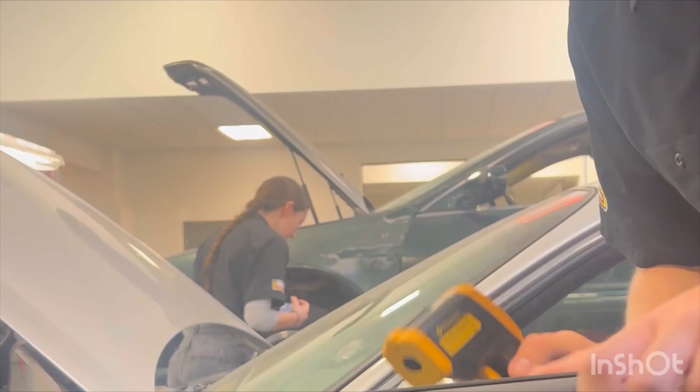Hi, I'm Adam. And I'm David, and today we are doing our catalytic converter temperature lab. And we chose a 2018 Hyundai Tucson for the vehicle that we'll be using for this lab due to the fact that it has OBD2.

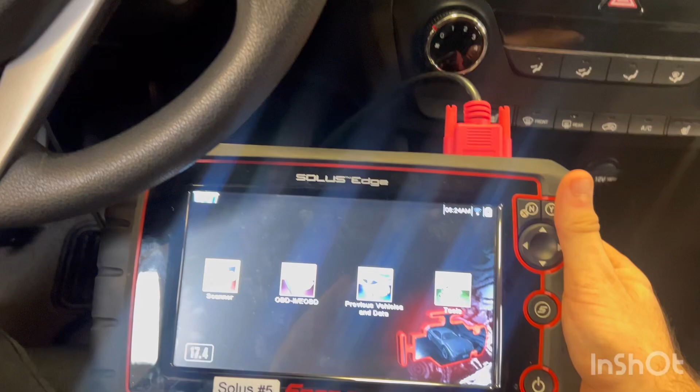Alright, here for the Hyundai, we're going to be getting our post-cat reading before we have the car started. It's going to be sitting at around 72 degrees room temp, and it should be the same for pre-cat as well due to the fact that we do not have the vehicle started.

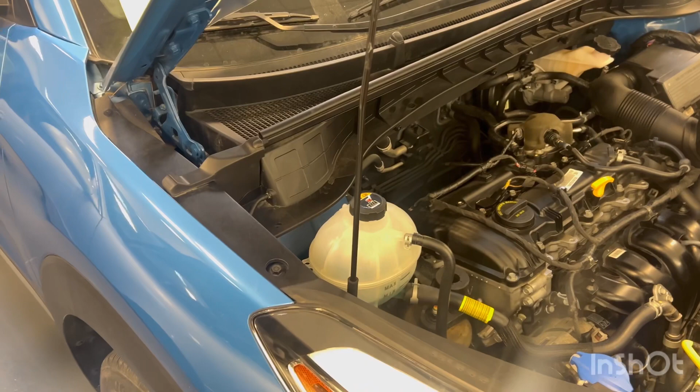So right now I'm going to have Adam start the vehicle, and I'm going to be taking the temperature every minute for the next 10 minutes of our catalytic converter to see it heat up. Now I'm going to start taking the readings once Adam starts the car, and we will be getting pre and post cat for the next 10 minutes.

Alright, here after a minute we can see that we're reading about 130 degrees pre-cat, and post-cat we're getting about near 100 right now. Here we're about the 5-minute mark, and as we can see we're getting readings about 260 degrees beforehand and about 150 degrees post-cat. So you can see that it has a crazy difference in temperature from before that catalytic converter to after.

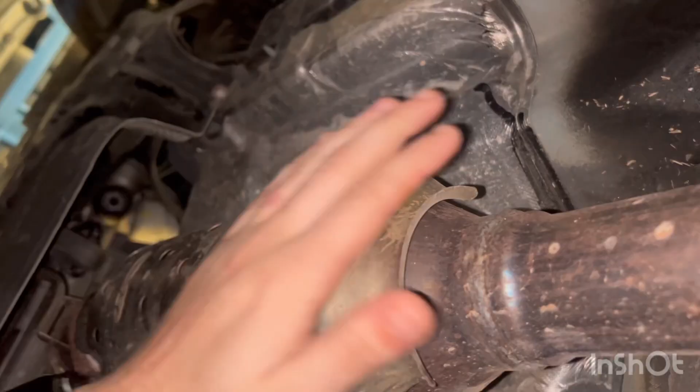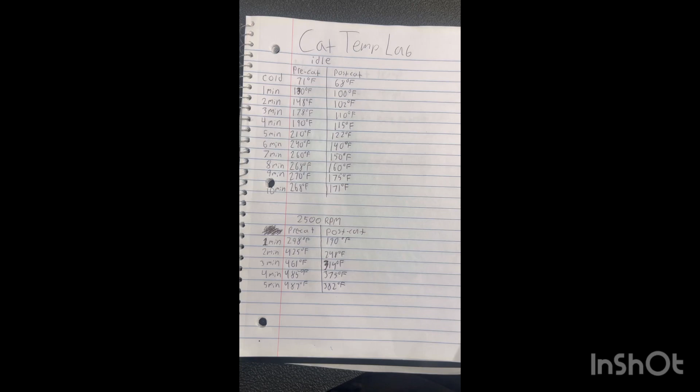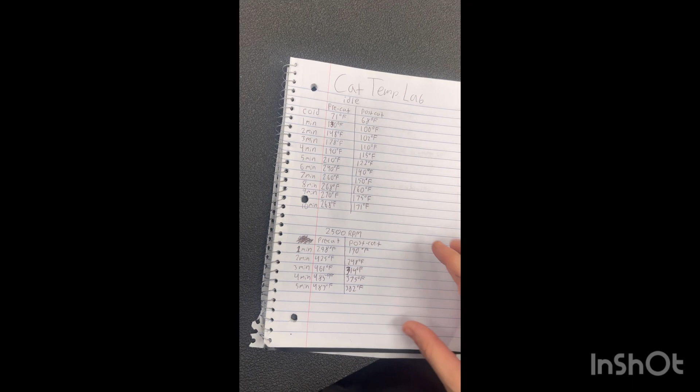So now Adam's gonna rev it up to about 2,500 RPMs so that we can see the temperature of the cat increase. So after around 10 minutes of getting our readings, we have our pre-cat and post-cat readings, and our pre-cat was around 100 degrees hotter than our post-cat readings, and that was at idle. And then when we looked at around 2,500 RPMs, our temperatures increased to around 485 for the pre-cat, and then post-cat it was around 382. So there was still around 100 degrees difference in between the two.

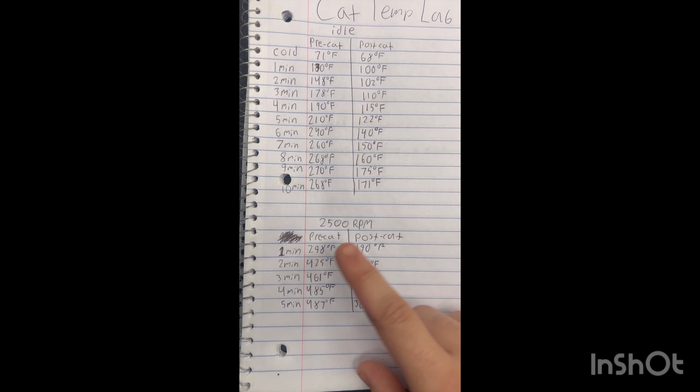So that was good. And then we looked at the normal inlet temperature, and that was around 265 degrees Fahrenheit or so. Our outlet temperature at idle was around 170 degrees Fahrenheit. And then how long did it take to warm up? It warmed up in about 8 minutes and then started to settle out. The hottest exhaust spot was the exhaust manifold, and then our normal temperature drop from basically our catalytic converter to the muffler was around 450 degrees.

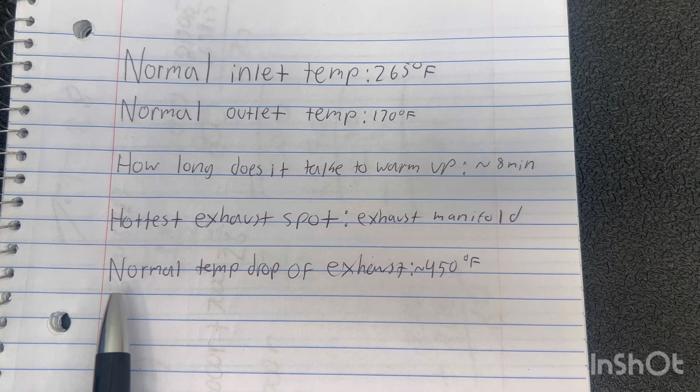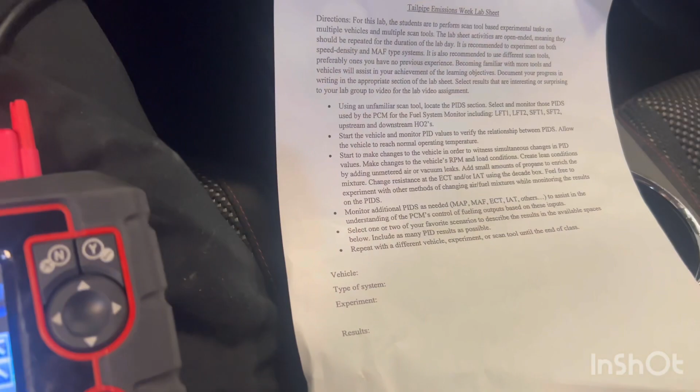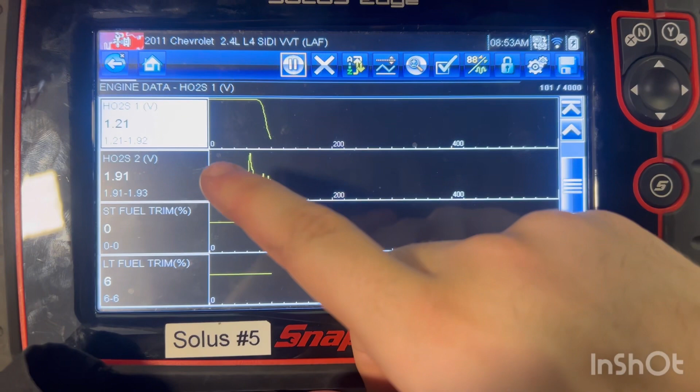Hello. Alright, so me and Adam are going to be doing the tailpipe emissions worksheet now, and we're going to be doing it on the 2011 Chevrolet Equinox. Alright, now we have started the vehicle, and we're looking at our heated O2 sensors for our first bank and second, and we can also see our short-term and long-term fuel trims. These are going to be our PIDs at idle, and as you can see we have a consistent streamline of data.

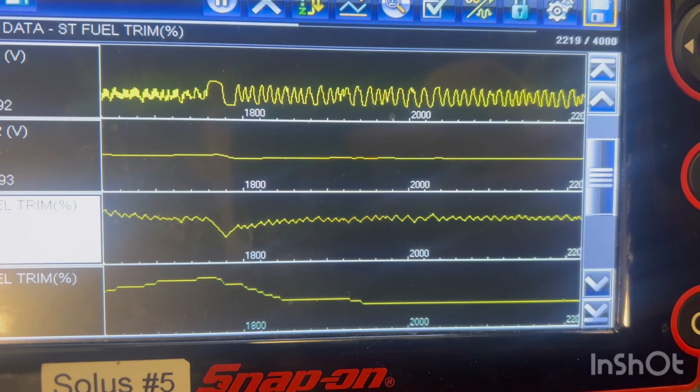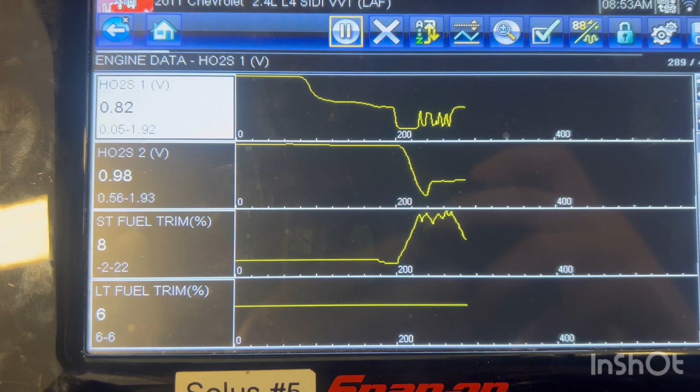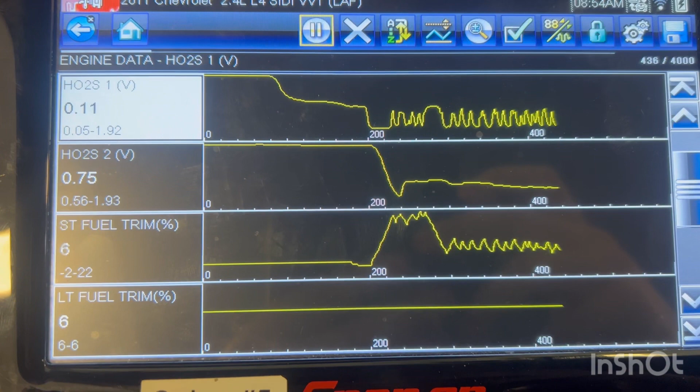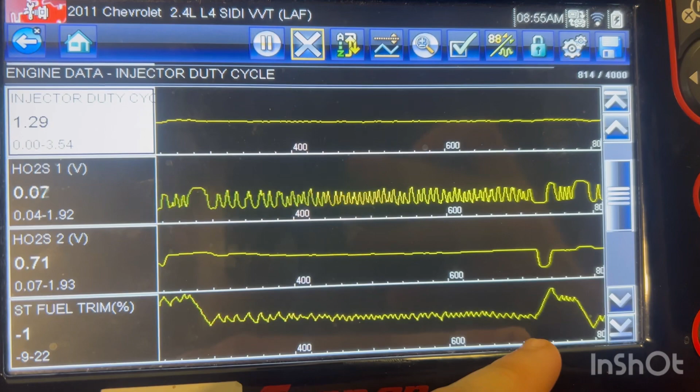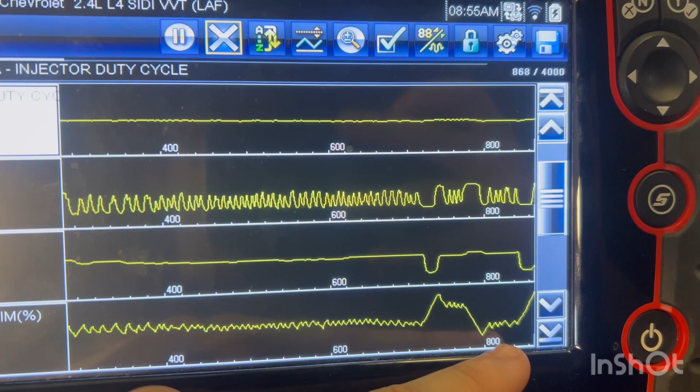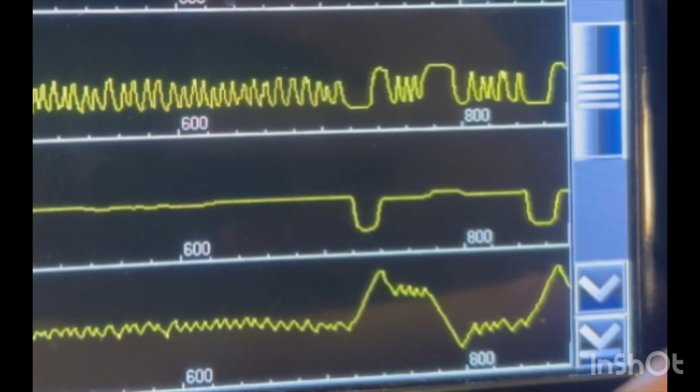So right now we're going to be looking at Adam causing a vacuum leak on the vehicle. And he's gonna pull the vacuum line right now. And as we can see, this is causing a lean condition, and we can see it displayed here by our PID values. So here one thing to say is that we noticed that these PID values were a lean condition due to the fact that those readings spiked, indicating that more fuel had to be dumped due to the engine indicating that it was lean and had too much air and not enough fuel. So it added excess fuel to make up for that lean condition.

So now we're going to have Griffin injecting propane into the intake system. And when this happens, it should create a rich condition, and we should be able to see it on our short-term fuel trims as well as our O2 sensor readings. And what we're looking for with these rich values is for these short-term fuel trims to go into the negatives as it's taking fuel away, and those O2 sensors reading a high voltage close to 1 volt, because that shows that we are reading rich, and that the PCM is basically telling your fuel injectors to take away fuel instead of adding more, because it knows that it's rich instead of lean.

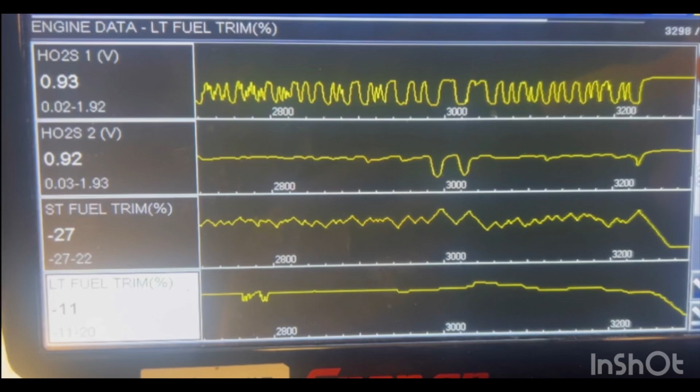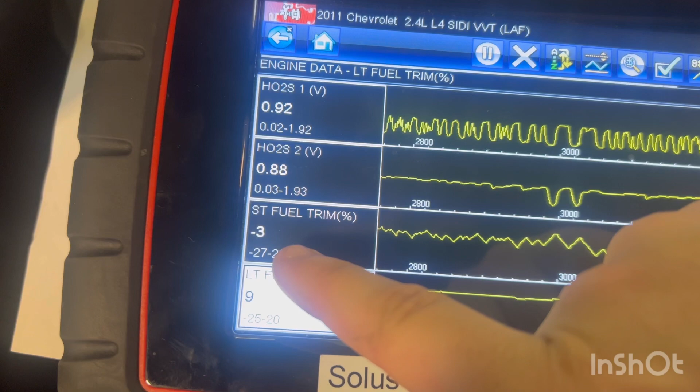So when Griffin added the propane into the intake system, as we expected, the condition came out rich. So our O2 sensor voltage was high, as it should be for a rich condition, and we can see in our short-term fuel trims that it was taking fuel away because it was determining that there was excess fuel because of the propane.

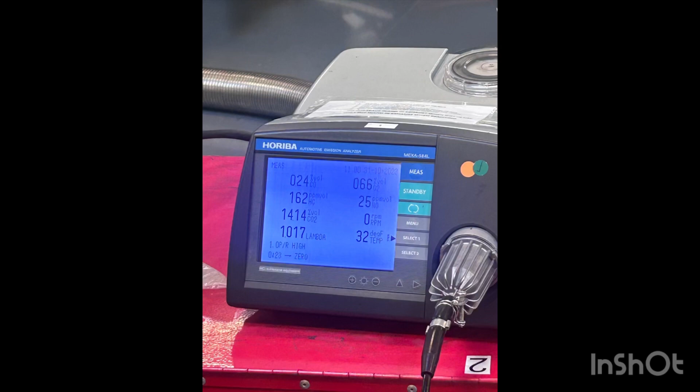So here we have our 5-gas analyzer, and as we can see, it measures hydrocarbons, oxygen, carbon monoxide, carbon dioxide, as well as oxides of nitrogen. It also gives us a lambda reading, and you can tell if your engine's running rich or lean by putting this in the exhaust tailpipe, and then it can give you these measurements. And these are some other readings taken off the 5-gas analyzer, which we used in class on Mr. Heisner's Impala.